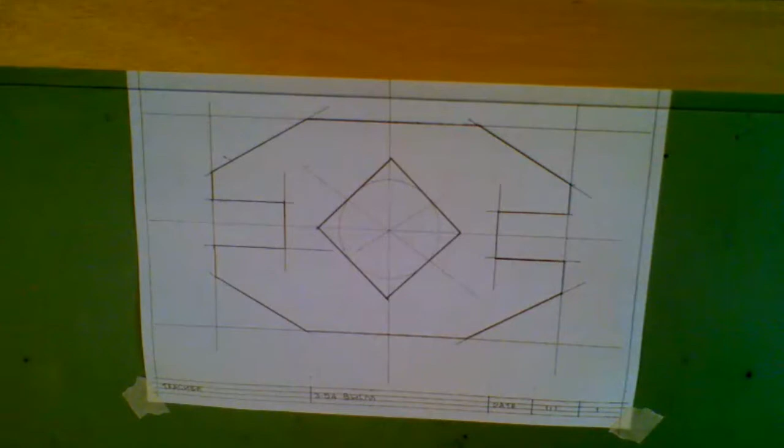Now that we've darkened our part, we're ready to begin dimensioning. The first thing I'm going to do today is to create a center line. This part lets me know it is symmetric because of the center line going through both the vertical and horizontal axes. That means it's got a long dash, little dash, long dash, little dash, and the line is thin.

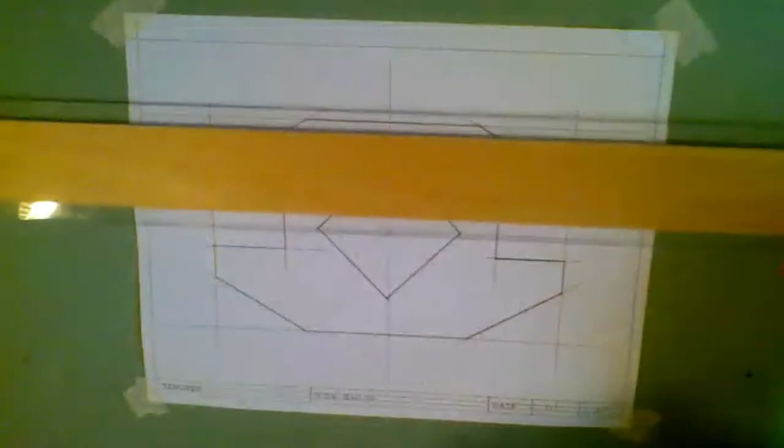So what I like to do is start in the middle and put a little dash, about 1/8 of an inch or 1/4 of an inch long, and then go about another inch, skip 1/8, inch, 1/8. You keep doing this all the way down till you're through your part. You'll want to do this both on the horizontal and vertical axes.

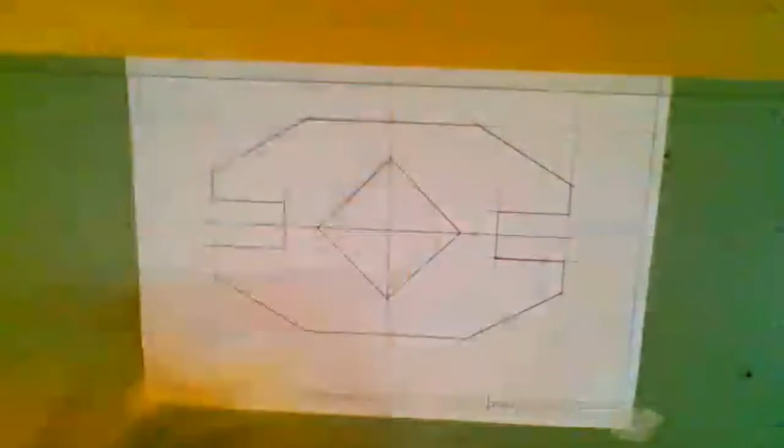Once you get your center lines drawn in, you can begin dimensioning. We're going to look at a few dimensions that I think are really important. The first one is over here. Let's take a look at this side. There's a lot going on. So I like to make sure everything is lined up so that way it is professional.

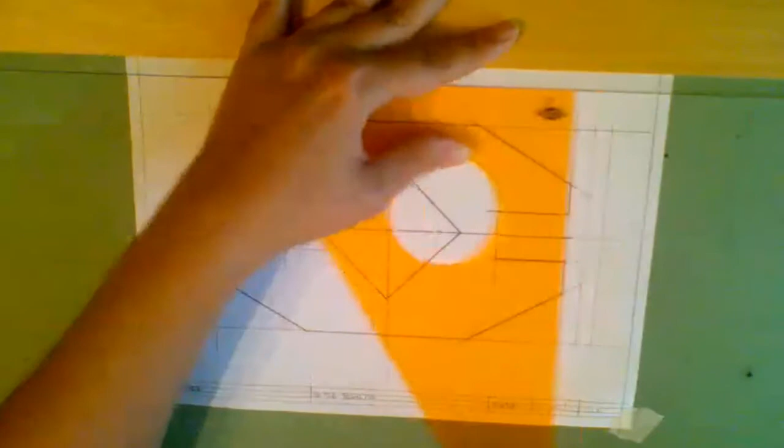I'm going to set a light line here that lets me know that I'm going to line up those two dimensions, the 1 1/8 and the 2 1/4, on the same line, and then up a little bit from that, it's about 3/8 of an inch to the next line. Once I establish where I'm going to place each of those dimensions, I'm going to use light dimension lines to create where my numbers are going to go, because remember, we must have our guidelines.

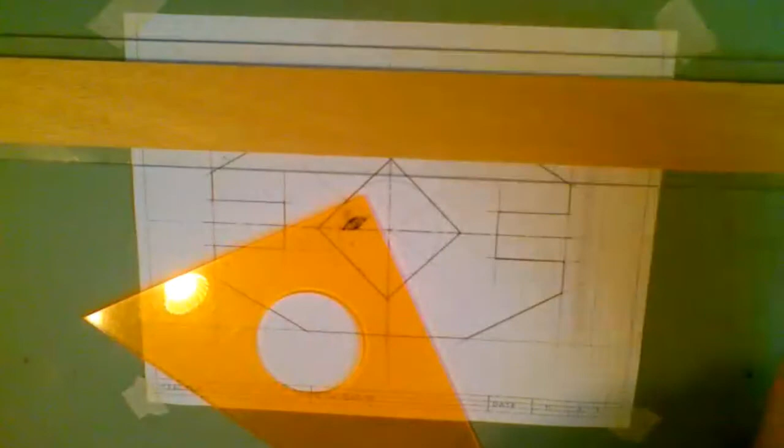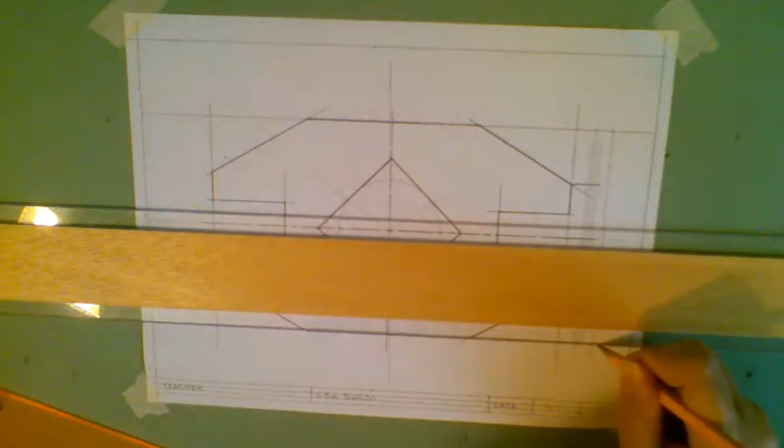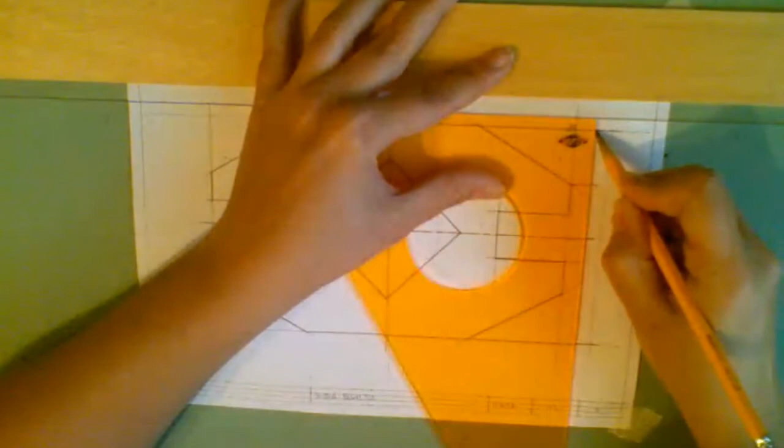When you create an extension line, it doesn't touch the part, and it goes beyond what your dimension line would go. Make sure you're using extension lines. That's how I know what your part is dimensioning. You should also have clearly marked arrowheads. We'll get to that in just a moment. Right now, I'm going to leave a space for my numbers. So you'll notice I just leave a gap.

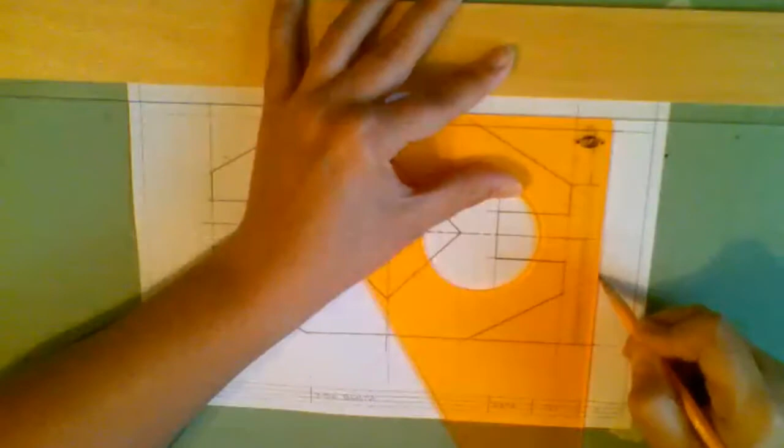You may be wondering why I am drawing out 4 lines. Each of those lines are 1/16 inch apart. Each number is going to be 1/8 of an inch tall. And since I'm using both whole numbers and fractions, they need to be centered with each other. Notice for my arrowheads, I only colored in the end. There are templates you can use to create an arrowhead, but just coloring a little bit at the end is okay. This dimension here is 1 1/8.

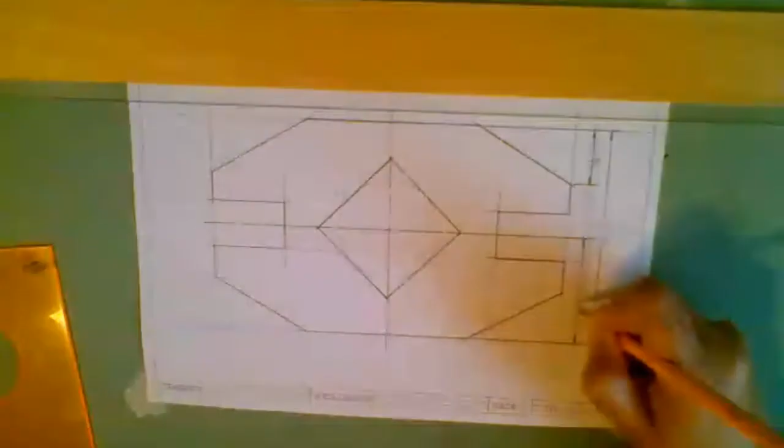So I'm going to use 2 of my lines, which are 1/16 apart, to create the 1, and then the top 2 and the bottom 2 to create the 1/8. The next one is 2 1/4. So I'm going to write that in as 2 in the middle 2 lines, and 1/4 on the top and bottom lines. And lastly, on this one, I have 4 and 1/2.

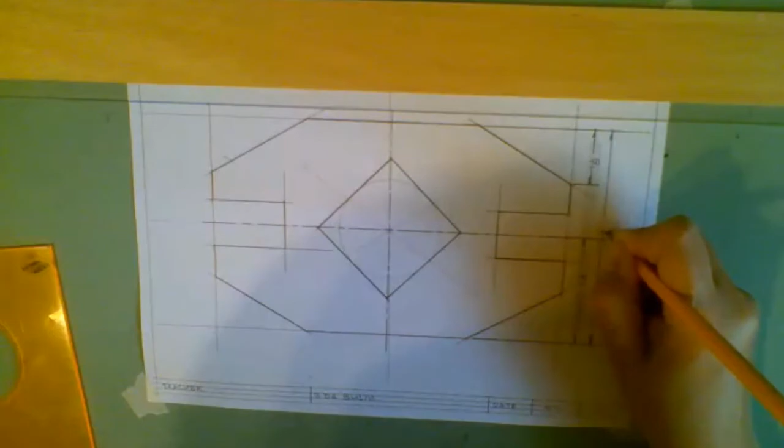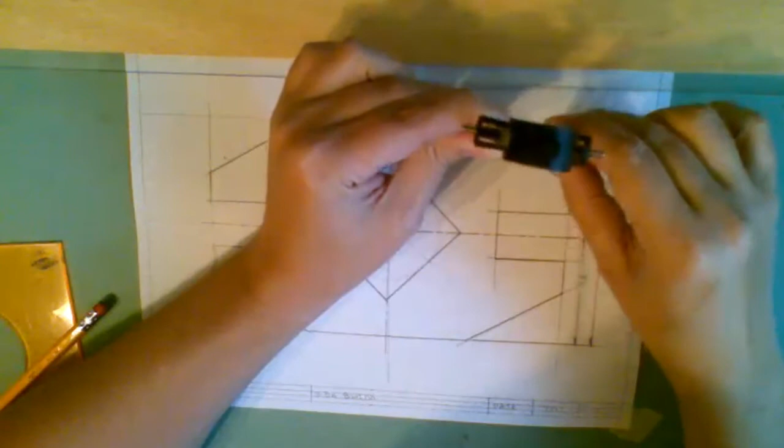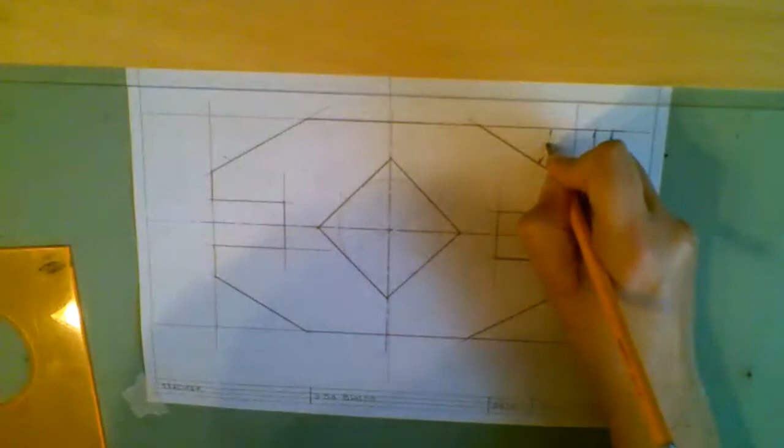We also have a dimension we're going to put in here, even though it's missing on the original drawing. We're going to use our compass to do this. You put it on the corner point, and we're going to adjust it so that it's somewhere in here. And we're going to place just little arcs with a gap in between so I can put my number. Put my little arrowheads on. And for this one, I only need 1/8 inch long guides. And this will say 30 degrees.

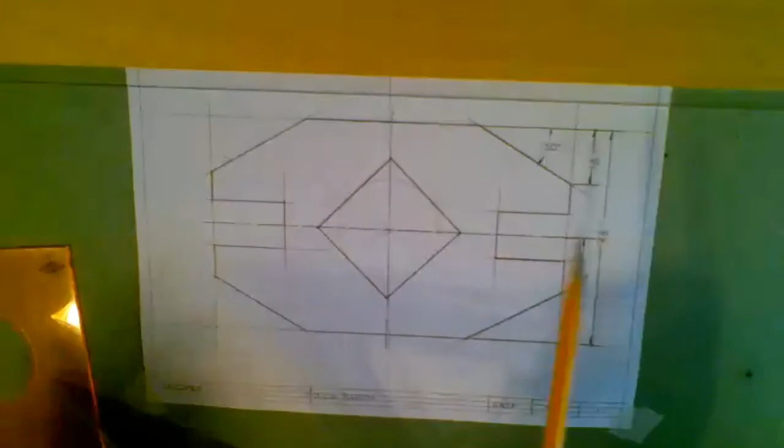You want to continue dimensioning in this fashion until you have all of the top part done. Remember to keep things aligned. And then we'll also have the square, which is what I'm going to address next. We want our square to be dimensioned aligned with the square. That means I'm going to use my 45-degree triangle to do this.

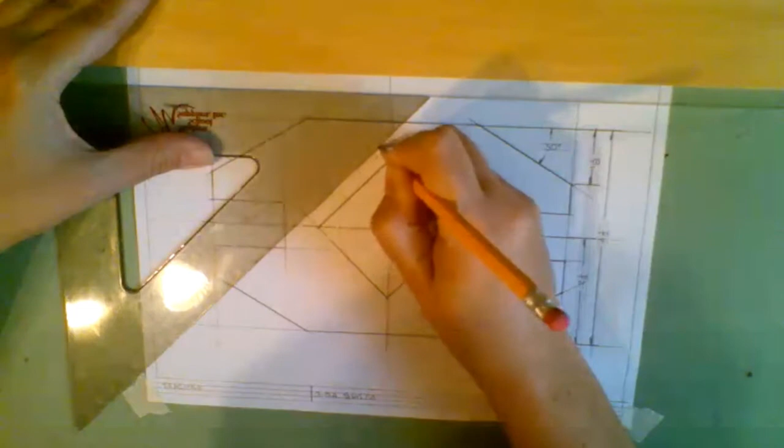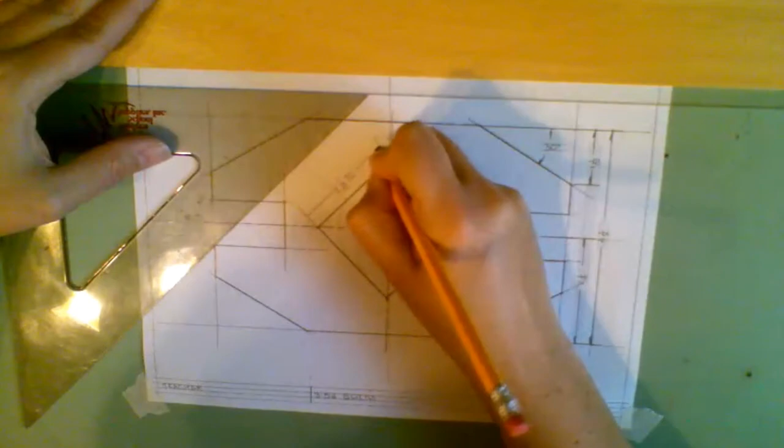Again, leave a space. This one's a little bigger. And again, I'm going to put in my 1/16 divisions. Notice there's 4 of them here. And it will say 2 1/8 SQ. Don't forget those arrowheads. The last part of this that I'll worry about is the 45.

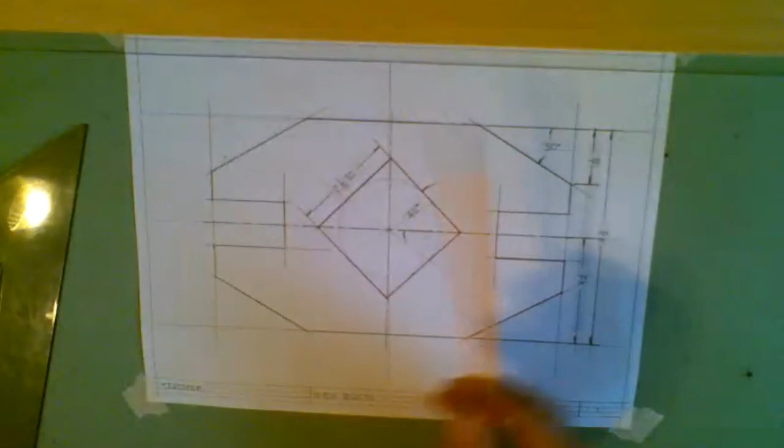Using my arc again, I'm going to create lines on the bottom, lines on the outside, arrowheads, and then the 45 is also going to be on an angle. This is called aligned dimensioning. Complete the other 4 dimensions on your own. There should be a dimension that comes to the center, goes to the slot, and that is overall. Make sure they're aligned properly.